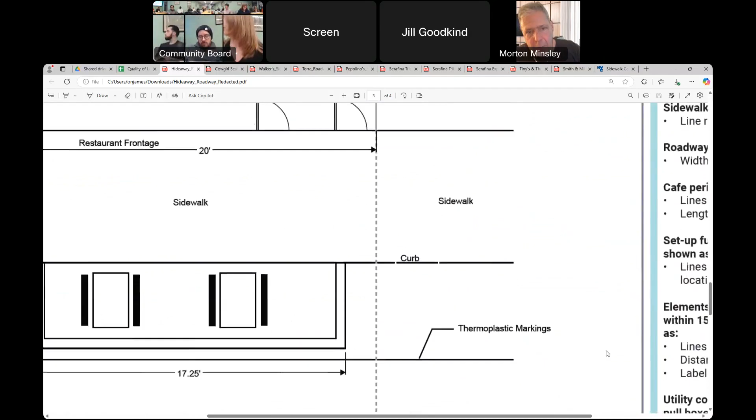2 picnic tables, and that picture is a fantastic representation, 3 people on either side of each table. I mean, very often it winds up being less because people don't want to share the space, so a couple sits down and that's it, sometimes you squeeze a couple more people. It's a lot of babies out there with their parents having lunch during the weekend. And there are umbrellas on those tables. Other than that, that's pretty accurate of what it looked like and what we hope it will continue to look like, and all of the stuff is movable.

Nothing's attached, we actually don't have a floor. We go straight down to the ground with a little bit of a lift for drainage, so there's not a platform. We can just pick it up out of the street and put it back in as needed. Our basement's large enough that if needed, we could remove the picnic tables and bring them downstairs.

We will be rebuilding what I'm referring to as the external barriers, because we had originally built them with just plywood and filled them with sandbags, which I understand is no longer best practice, so we're looking to have water-filled containers instead. We just build that and then box over it with plywood again. We're going to keep it super simple and expand just a little bit, because we're fairly small and don't need anything bigger than what we're doing.

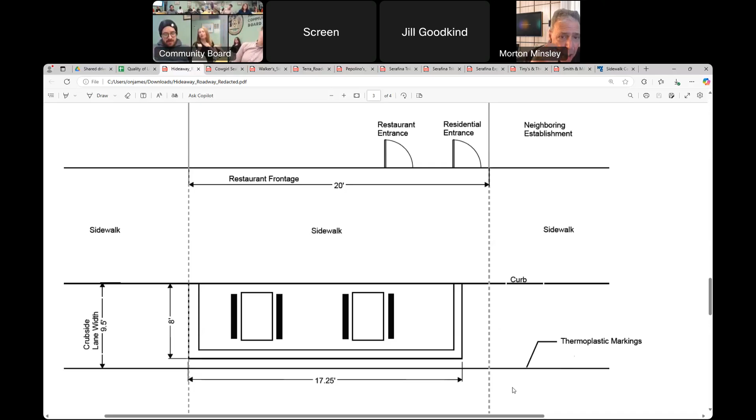Any questions from the committee on this one? Were there, in the previous years, any problems with rodents or other vermin? Because I know the platform ones... Knock on wood, no. And I will say we do maintain ours fairly well, we've got a porter that comes every night, we've got our pest control services, but I will also say I had some fantastic neighbors that were really diligent about keeping our street in general very clean and maintaining their spaces as well. Everyone at Laughing Man and also at Duane Park Patisserie, we were on it as a street, as a block, so I feel like that was very helpful. Again, knock on wood, no, we did not have a problem.

Were there any notable neighbor complaints? Not about outside, we always had it cut off at 11 o'clock as soon as our kitchen was closed, and earlier in the week our kitchen closes at like 10 p.m. So even then, we also close the bar at midnight. So here and there we come outside and scold people, but I never really had many complaints, or at least nothing that got to my ears, nothing significant enough that I got an angry email or phone call from management, et cetera. So besides this outside seating, you don't have any other outside seating? Do you intend to? No, our sidewalk's way too narrow. I feel this is enough.

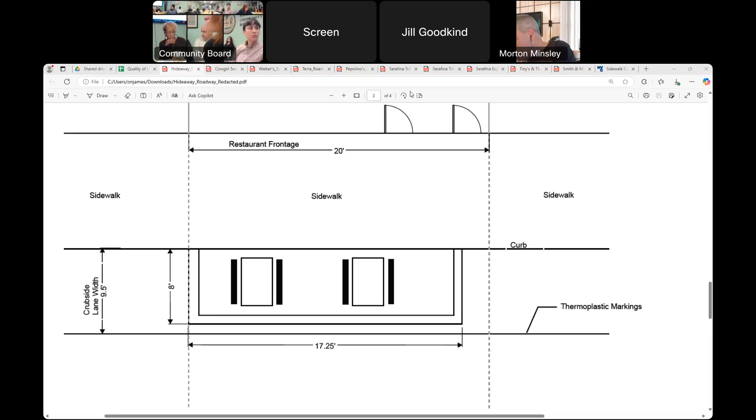Our curb is actually extremely low, but I think I'd have to make sure it was ADA compliant, with a ramp down onto it. Other than that, it's an old curb, so the whole thing feels kind of like a curb cut, like there's a curb cut at the corners. It's about that height, so we didn't really make adjustments other than putting a wedge to make a very small miniature ramp previously. I want to consider that. Yeah, for sure. To get into the restaurant there's a ramp, and then there's an ADA bathroom.

Bring the umbrellas to the table. There's a very, very heavy weighted base that basically lives underneath the table, which can be moved - you kind of tilt it and roll it, very heavy. Then they go down and are screwed on two sides.

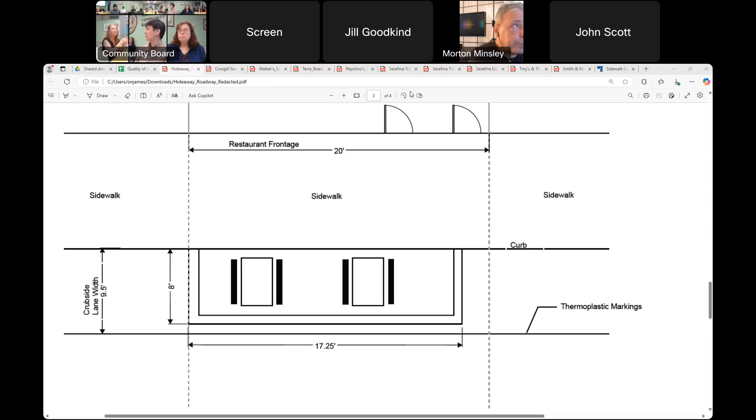We're also fairly diligent, and knock on wood, much like with the rodents, we haven't had a problem - we keep an eye out when we see the wind pick up, especially in Tribeca where there's all these wind tunnels. We run out, say sorry about your shade, and close the umbrellas and bind them back up. Sometimes we don't even open the umbrellas until somebody asks for shade, because it's nice to look open, but then we don't have to worry about where the umbrellas might go on their own. Knock on wood, we've been lucky in the past just by being aware.

Where's your garbage kept outside? Our garbage isn't kept outside, it's kept downstairs. Now that the residents can pick up, hooray, we're actually keeping their garbage can downstairs as well, and my kitchen guys bring it up and put it on the curb. We're keeping our distance a little short to make sure we have space for that at a certain time of night for the residents to place their garbage. All of our garbage goes straight downstairs into the basement until about 8 PM, but we don't bring it out until after 10 PM for our commercial pickup, and then we bring our cans back downstairs before the bartenders leave in the evening, most times.

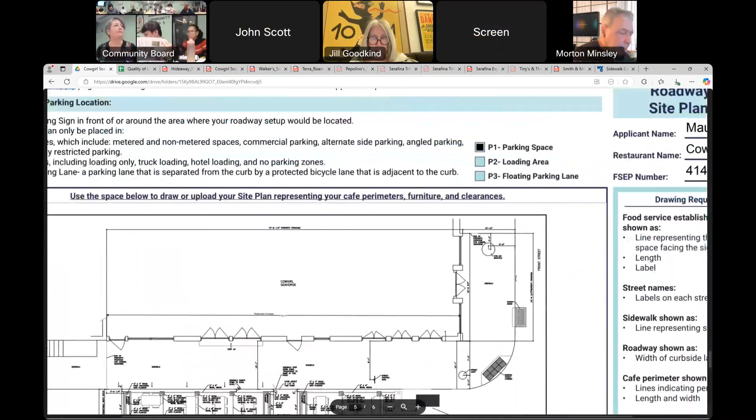They were very kind to help us with that. So we have a manhole cover, a transformer cover, and things like that, which we've now designed around. On one end we have a curb cutout so it's accessible and level with the street. On the other, shorter part, you can see them in here — it's really, I guess I should have zoomed it more.

Could you come show us what's going on here? Of course — I can see what it is, though that doesn't mean everybody can. Here's the transformer box we used to go over. We have one corral here — we call it a corral because it's down — and then a second one here with the 6 feet required between them. There's the transformer box here that we used to go over, and now we don't.

Is that metal thing on the sidewalk part of it? It's there, but it's covered up — it's not part of our setup. I think you can move our cafe off a bit quicker than you can move the car that's going to be there, but either way, we're complying with what they've asked. We have planters around the outside. This side is already accessible; this side will require a ramp, which we're planning to implement for accessibility.

Go, because the floor doesn't come up to the curb? We no longer have a floor. To have a floor now, you have to have the removable and cleanable kind. I decided for this round, with all the new things happening, to keep it as simple as we could. Are you changing the curb type? Yes, we have a curb cut out here from an old use of the building that was never taken away. So you're right by the corner, you have to go into the sidewalk.

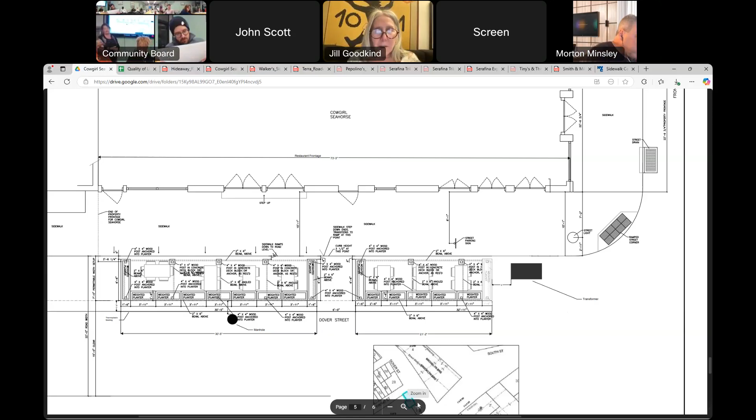And you don't intend to do that again? No, we're not applying for sidewalk seating right now. We think it's a waste of time and money because we don't think we have the clearances.

Thank you. But does it not have the road bed for the vehicular traffic? Yes, they made us shorten it by 7 inches or something. That was one of the other requested changes from DOT that they implemented on our final drawing. We were 7 inches too wide for the emergency vehicles. They have to be seated. Very narrow.

Where's your space for when you put out the garbage? Garbage goes, we have a garbage room inside as well, but we also have 3 of those sealed containers that go along the side of the building away from.

And you have problems with rodents? I mean, we're a block away from the seaport. I'm not saying we've never seen a rat in our lives, but we have a really great exterminator. We plant a lot of mint, which I thoroughly believe helps keep them away. In those planters there, yes, the planters have herbs and fun things to go with our theme, but also be beautiful. We attract monarch butterflies and little birdies. It's sort of a nice little slice of nature.

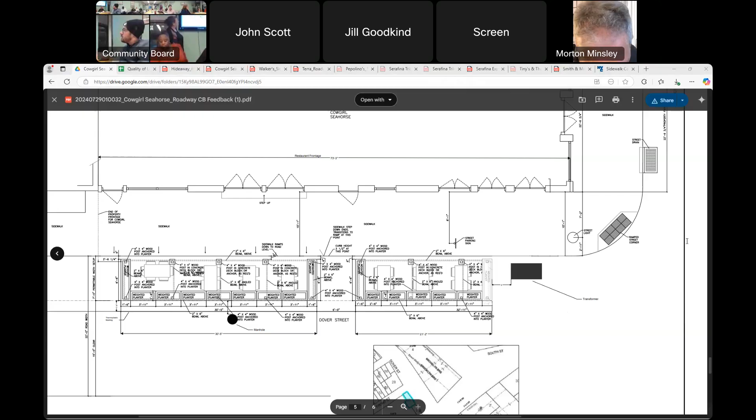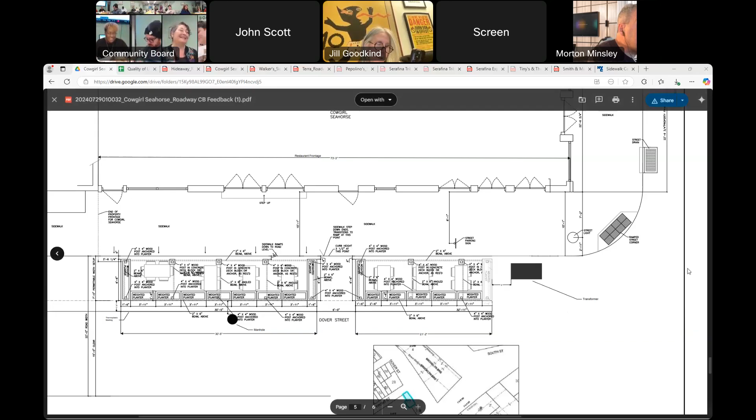We went over that. Just a comment - I've been looking at 311 complaints for each of these and there's not a single noise complaint. Yeah, they're a great place. It's impressive, thank you. We really like to be part of the neighborhood - it's important, I think. They cleaned up the bridge and lit it up, it's really nice. And you're not on the other side of that monstrosity they're getting ready to do.

Talking about 100 Gold Street - nobody commented on that. Which one's next? 250 - no, I didn't see any either.

So can we call the question on this one? Second. All in favor? I would just say everybody - anybody abstain? Anybody abstaining?

Anything? Wasn't that nice? They're so big.

How are we voting here? Are we saying aye or raising our hands, or nay, or whatever? Do you support - do whatever you feel good with.

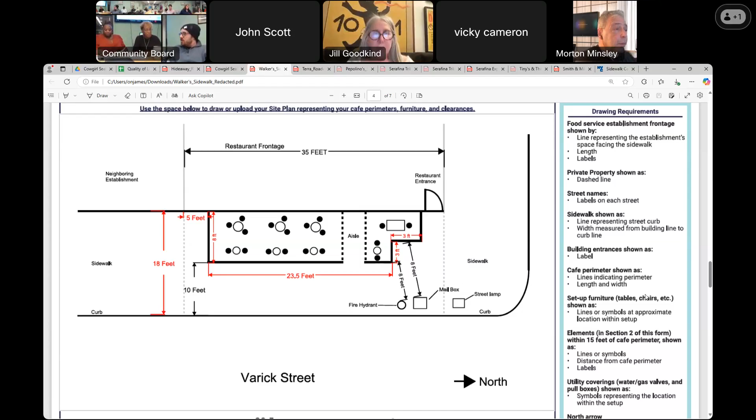Did a dumpster picture? I'm so sorry. In the photos, where is that? Where's permanent? Yeah, that's a permanent dumpster. Is that where you put the garbage from this? Or is that a storage place? That is actually for the residents above. We have our own big containers that we keep downstairs inside.

So there's 15, 16, 17, 19 seats outside. About the tables themselves, we usually set them up in fours, but because there's a little bit of space in the cafe itself, we would be able to turn a 4 into a 6 without going past our area.

Okay, but keeping that in mind, there needs to be enough space for service. Yes, but you're gonna have that obstruction there, so they won't be able to walk on the sidewalk. I mean, yeah.

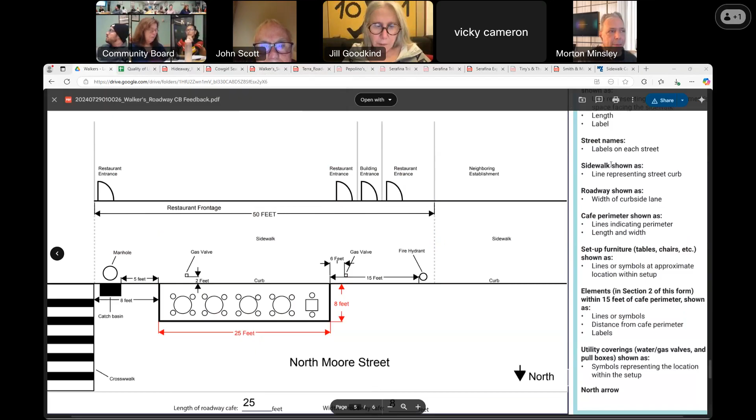The roadway was also, so they're coming back with that sidewalk, because the comment said please ask Walker's to... I believe on the inside, we can seat about 75 to 80. So you're getting an additional bunch of people. The families there, they like to bring people outside for the spring, during spring and summer, and all the dogs.

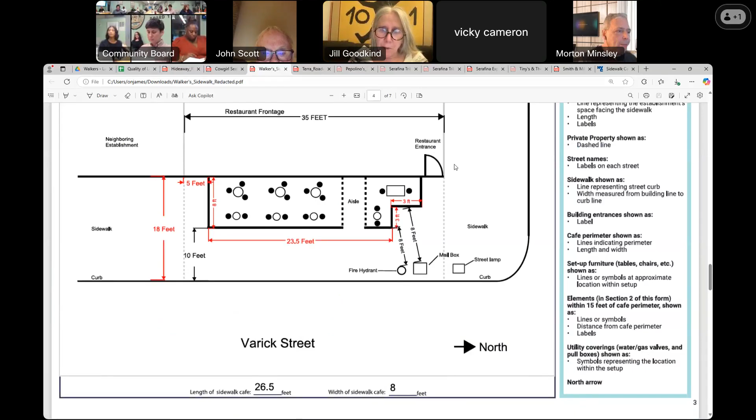I have a question looking at the drawing, I'm trying to understand where the grates are. Is that on North Moore or is that on Varick? On the Varick end. Okay, so people have to walk on the grates.

Can the lady please answer? Do people have to walk on the grates the way you're gonna have this set up? Where would they walk? There should still be enough sidewalk for people to walk without being on the grate. Between the grate and the flower pot, that little small stretch, people would have to walk single file, is that correct? I'm just trying to grasp it.

No, I mean, I've seen probably at least maybe 2 to 3 people walking alongside each other that would be able to fit on that sidewalk. Yeah, because it looks from this angle like you'd have to be single file not to walk on the grate. Am I misinterpreting that then?

I think it's really just that the growth of those bushes in this picture looks a lot more overgrown. Yeah, definitely a lot of overhang there, but that won't be part of the outdoor space once we finish all the new planting and such.

I do have a big concern about this because of strollers. People with canes can't walk on that. People with high heels can't walk on that. On weekends, when you have all the brunch going on, it gets crowded. Do you have a measurement of how much walking space there is actually for the public? Without the grates, because with the grates, it's 10 feet from the drawing. Without the grates, how wide is it?

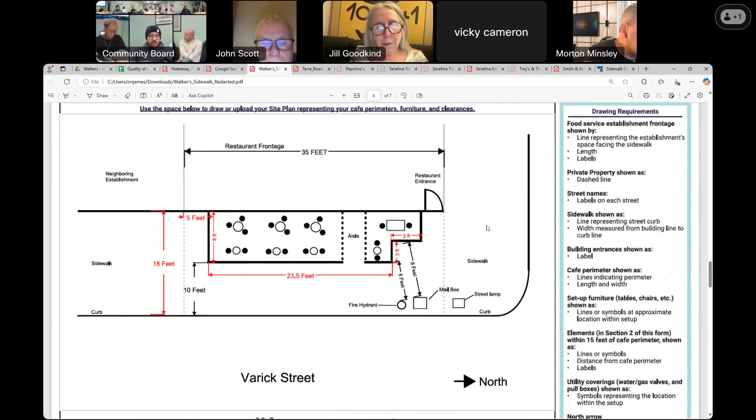I got half that, 10 feet, that's what it says. But the grates look bigger. Can you go back to the grate picture, 10 feet of the grates, please? Look, it looks like there's more grate than sidewalk, and that could just be... is someone talking to me? The sound's not great, so you have to bear with me on this. Is the sidewalk flat and even?

Yes, I would say for the most part it's flat and even. There's no incline or anything, and we don't have any issues in the sidewalk there. It's just two different materials that make it look like it may not be even.

Correct, yes. So these are also the conditions that have been there for 5 years at this point. Wait, who's talking now? Is that somebody from the restaurant? No, no. Oh okay, I'm sorry. I just want to hear from the restaurant people right now, please.

All right, I'm very concerned. I'm sorry, I just want to finish my statement. I am very concerned that with anyone walking 2x2, someone pushing a stroller, that is just not enough room. And that's my final thought on that.

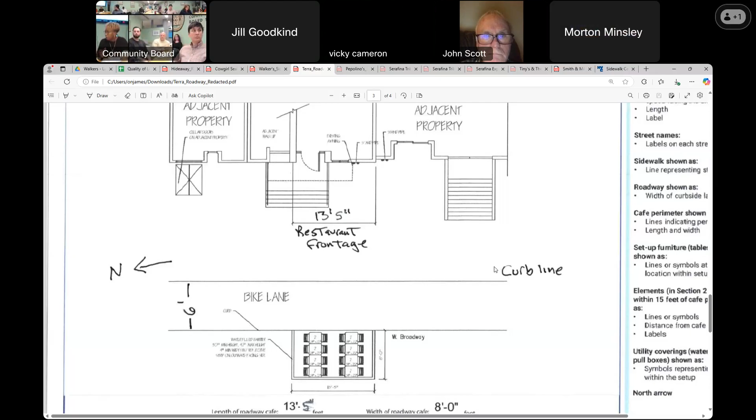It's been 10 for some folks. We want to be consistent. On Sunday? Yes. Yeah, we can do that, no problem. 10 p.m. clean, or 10 p.m. we do not sell anymore. Finish, yes, the last serving, last call, not a problem, not a problem.

Somebody online had an interesting question about the bike lane situation. Is there a photo available? Unfortunately, I was trying to get the photos for you guys today, but our server was down most of the day, so there was an issue getting onto our files for the pictures.

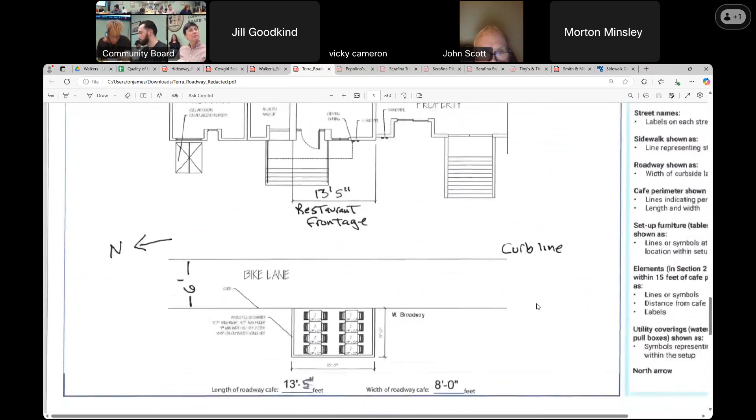Oh, got it. One of these tables is going to be for ADA, right? Yes, probably one of the ones on the end. The end ones would be the ADA tables.

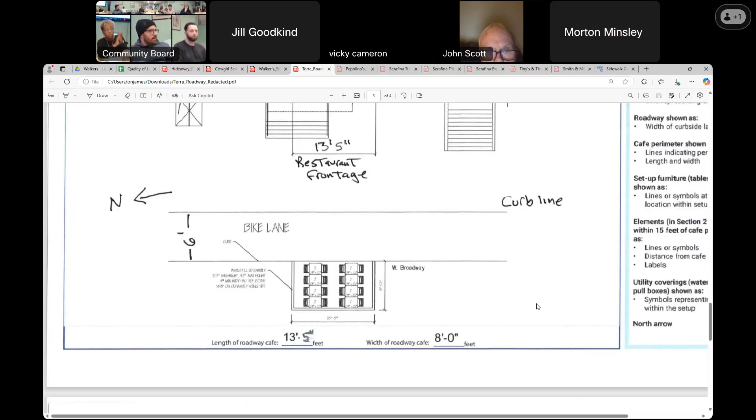Like everybody else, how deep is the curb? Are you probably going to have a ramp? We'll go with a company that makes them flush to the sidewalk so they can pull out, so it would be ADA compliant. So just a little ramp you'll build, but it has to be put in and taken out as needed because there's a bike lane there, right? Exactly. Yes, so there would be a ramp to get in.

We haven't fully figured it out, but since it's the bike lane, they probably were going without the flooring. I don't think they can have one, because of the bike lane they can have a type of floor, but it has to be removable. So that's what we were all talking about, but it's one of those things that's tricky since there's the bike lane there.

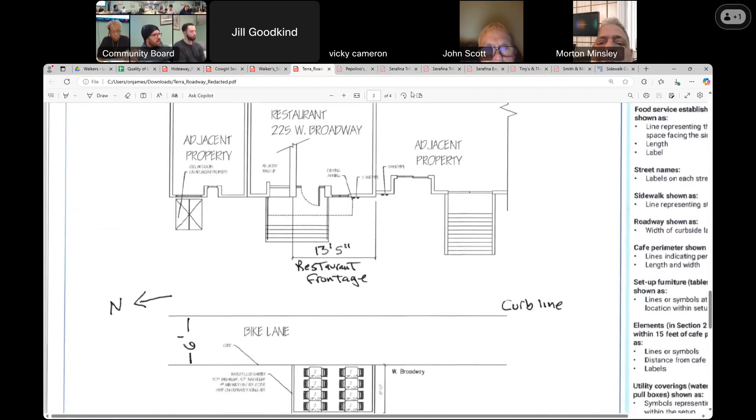There was previously some seating on the sidewalk, right, by the door? So now we can only have two tables of two by the windows. Right, they were high tops, I think, right? Exactly. And you would want to do that again?

Yes, because if you went by Terra recently, you can see we have the outdoor vestibule with those two tables there, and the table really does not block anything because we have a very large sidewalk, thank God. So there's no problem. We have a lot of strollers in that neighborhood, we have a lot, but we never had any issue with this.

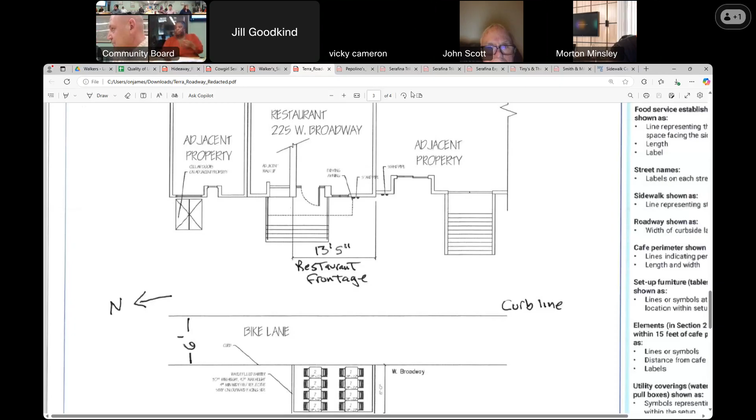Any other questions in the room? Everything seems to be compliant with DOT.

I'm just concerned about the bike lane, how the logistics would work with the bike lane, because I see that being a problem. It's a little awkward. So the bike lane has been here for about 9 months now. We never had any issue with the bike lane so far.

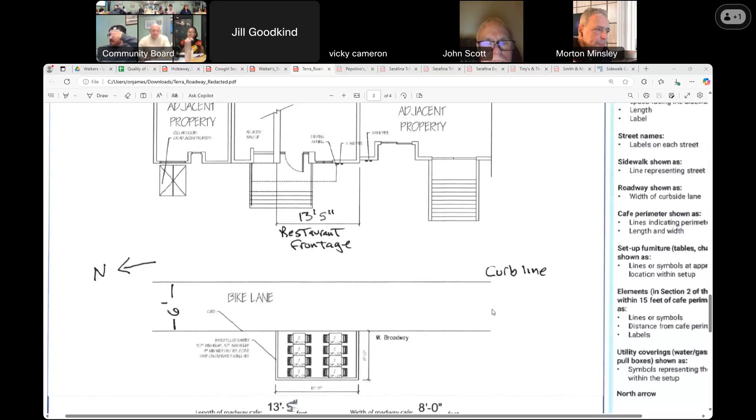They have that set up on much busier streets too, you go up and down some of the avenues, they have the bike lane on Amsterdam I think, and this is fairly less busy by comparison. You'll have to cross the bike lane to get in, no way around it. Yeah, much busier there, definitely much busier as well.

So you have to cross the bike lane to get to the structure here? That's what I hate about them, because you're letting seniors out of the car and they have to basically get out into the bike lane. I can't stand that. Or into the street. Some step into the bike lane, cyclists don't stop. I know, they look at you like you're the issue going across. Seems not controversial to me.

This license, this one, yes. Any questions online? So can we call a question on this one? Yes. All in favor, anyone opposed?

Everyone's in favor. Morton, you're opposed? You're in favor, okay. I'm in favor.

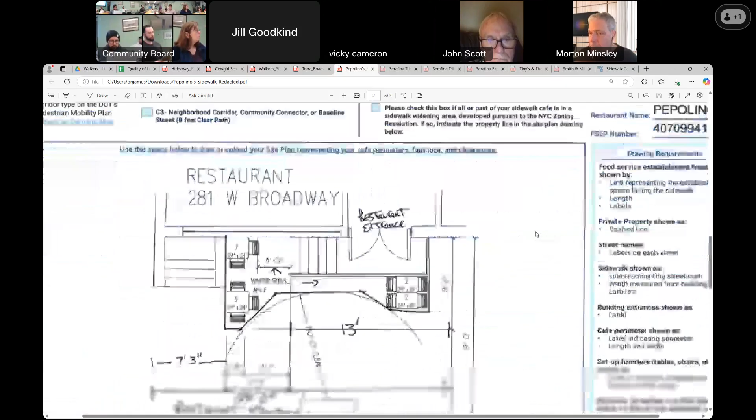Okay, so this is the Sidewalk Cafe application for PEC Group, DBA Pepolino's. We've been open and operating for over 20 years and had a Sidewalk Cafe license since 2003 with 5 tables and 10 seats. Due to the new rules, we have to be 8 feet from the tree pit, so we will now have 4 tables and 9 seats. We'll be using 8 feet in one section of the 19-foot sidewalk where there's 2 tables and 5 seats, and 38 inches of a different section where 2 tables and 4 seats are.

I'd like to ask, any questions? How come you don't have any indication about the major obstruction in this area, about the train station? Is it to the right? The train station, I don't think we're close to that one. Is it? There's no entrance to the AC.

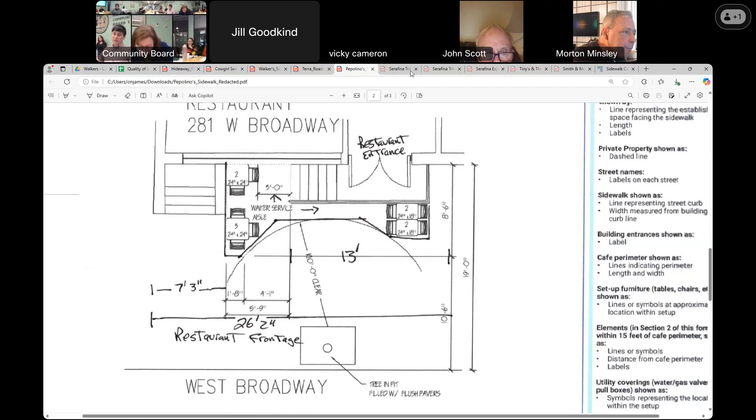What are you gonna have? Probably gonna do stanchions. Oh, with like rope? Yeah. Rope for the pole ones. Those are easy to pick up and take away, too. That's a good idea, you can bring them inside and it gives you that space where you can make sure you have the space.

Needless to say, you're not considering a roadway. No, unless they call us and say they wanna try, but this would be a great spot for that. Yeah, this one was an awkward one altogether.

Can we call the question? Second. All in favor? Okay, online, all in favor? John Scott, in favor.

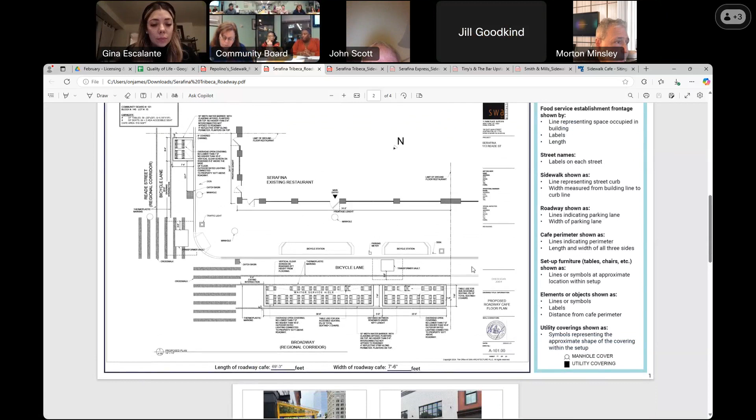Wow, okay, let's start with the roadway. We're beginning with the roadway first. Okay, how many seats do you have inside the restaurant? Let me confirm that with Kevin.

We don't have any pictures, we just need to know. It's 130 something, just outside. New bathroom, it's a large venue outside. And there's an upstairs, I don't think you can- yeah, and then there's an upstairs. How many toilets do they have? It's two.

Well, I mean, it's two separate kind of roadway pathways. That matters, yeah, if it's separate, we separate the space into two sheds. It's not supposed to be, for the whole Broadway Street, because they have a long facade. Free share, you know? Gina, is it supposed to be a 6 foot separation? It is - when you have a 40 feet length in a roadway, you need to put a 6 feet separation in between roadways. But if it's less than 40 feet, you can have 3 feet for the separation.

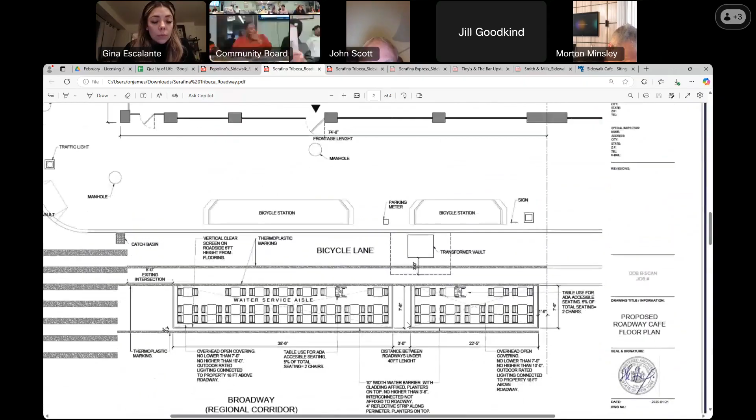That's criteria for- can we not separate the two and talk about the totality first? Because we're talking about the sidewalk, this thing, in addition to the roadway. Well, right now we're only talking about the roadway. Oh, I understand that, but I think it would be helpful to get a full scope of what's being asked here. Yeah, I don't disagree with you, because I'm already thinking about the number of people in totality, like you said.

So for inside venues, we use the Department of Buildings guidelines, and they constitute a large venue at 75 people. This is talking about over 130 people outside on the sidewalk and in the street. I don't know how to necessarily go about addressing that.

Well, I guess my first question is, are we talking about the roadway or the sidewalk or the whole thing? Roadway first. So the comments that we need to put in, we need to put in comments for the roadway - it's a separate form, and then comments for the sidewalk, which is a separate form. That's why we can't do them together necessarily, but you can discuss them together.

Right, so I guess my question is, unless I'm mistaken, there's an element of the sidewalk shed that's still there at the moment, is that correct? Sorry? No, the sheds were taken out already. Actually if you go to Google Maps, they don't appear anymore. The sidewalk ones, the ones on the sidewalk?

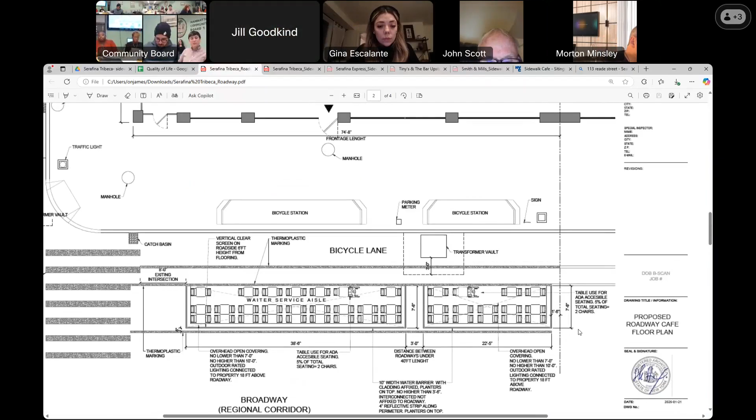I'm waiting on the response on the ADA bathroom, but as soon as I get it, I'll let you know. Thank you. Now, answer me this: how did you come to that number of seats outside?

What do you mean, how did we come up with this number? To maximize the capacity - how was it determined to attempt to put 130 seats outside? Well, we fit as many tables as we could, to be honest. But as I said before, we're open to changes, we know there are going to be some.

How many did you have before? Before, during COVID? Yeah. For the roadway. They did - let me confirm that.

The main bathroom on the main floor is ADA compliant, and 3 bathrooms upstairs are not ADA. Thank you - how many, I'm asking for the public. 35 on the sidewalk and 80 on the roadway.

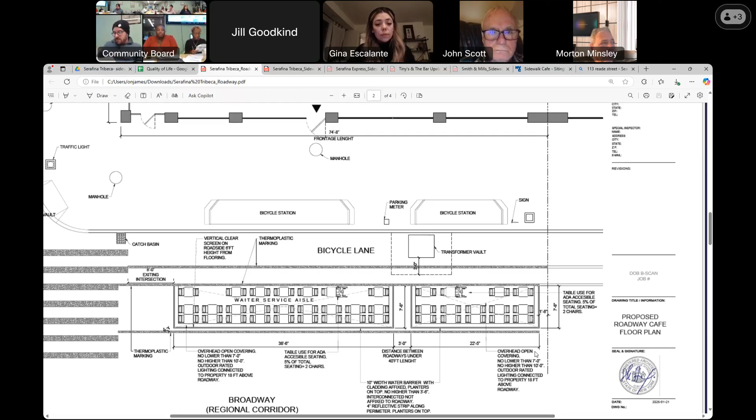As a starting point, I'd say the ones on the more residential street, Reade Street, is not something new we should do. First, to share with the committee, based on the number of bathrooms, Ned is looking at the regulations. She brought it up a few minutes ago - for 200 people, it's 3 bathrooms. That's the capacity.

So 200 people is the capacity for 3 bathrooms. Just to clarify, there sounded like there was 1 on the ground floor and 3 upstairs. Is that inclusive of the employee bathroom? I think that was separate from the employee bathroom, but only 1 is ADA compliant.

Is there anything additional? We should get clarity, because she said 3 before, now she's getting 4. There was a reference to 1 bathroom on the ground floor and 3 upstairs. Are those all publicly or customer accessible? They confirmed they have 1 bathroom that is ADA on the main floor and 3 upstairs that are not ADA.

Are those all customer accessible, apart from the employee bathroom? They have the employee's bathroom separate - that's additional, in addition to the 4... correct, in addition to the 3. But that's only for employees. Okay, so 4 for the public altogether and 1 for employees.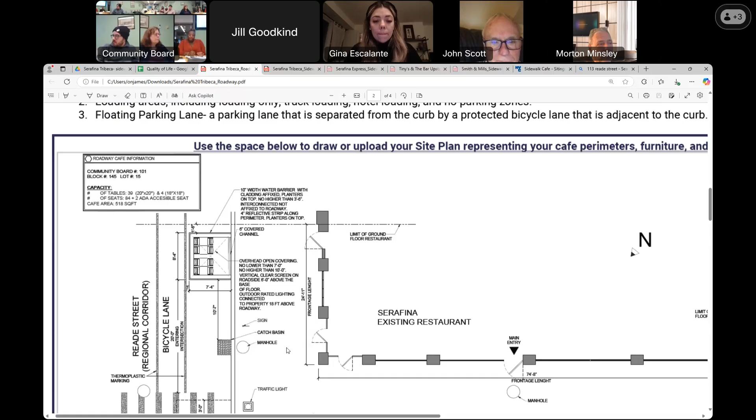We're just trying to make sure we're clear, because earlier you said there were 3 bathrooms accessible to the public. Now we're saying there's 4. Is that correct? 1 ADA and 3 that are not ADA.

Is there any regulation regarding the number of ADA bathrooms for the number of people? Since ADA is the only one on the main floor, if more than 1 person upstairs needs that, it could be a problem, but there's no regulation for that, she said.

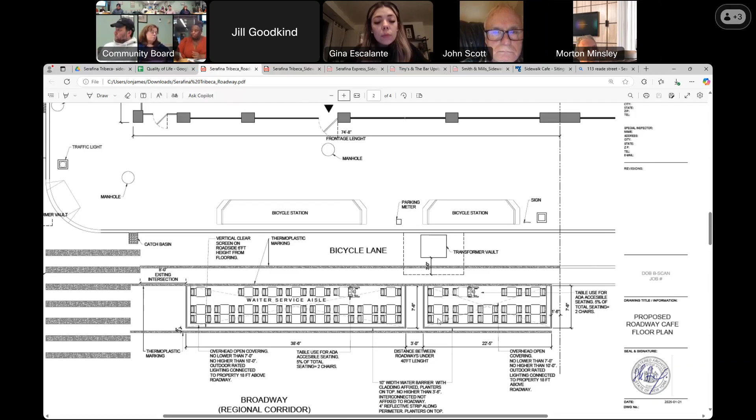Okay, so with 4 bathrooms, the total number of people they can have outside is 74. So we can start from there and make further adjustments. So you're suggesting the maximum is 74 - that's not for the outside question, that's the regulation.

So what if we start - you said 85 outside, right? 84. Okay, so we've got to get rid of at least 10 seats outside.

I think the most viable option would be to eliminate the shed on Reade Street, which has 4 tables, meaning 8 seats. I'm looking at this index - are the Reade Street ones meant to be the ADA accessible tables?

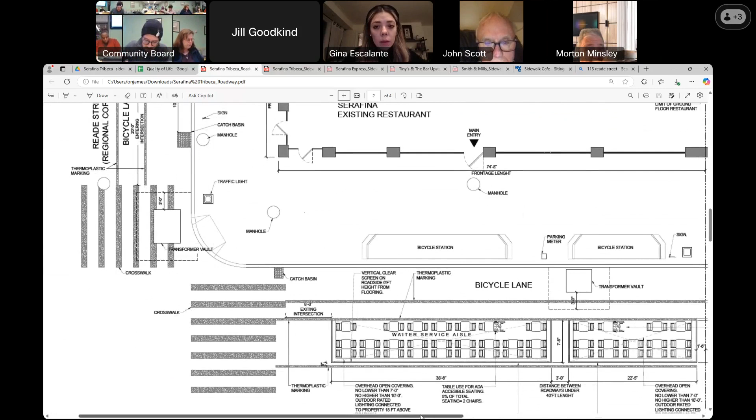No, we can leave the ADA accessible ones - we have them right now on Broadway. Jared, look up there - these are the ADA tables. Oh yeah, there's one in there, see that? Here, you're pointing here? Okay.

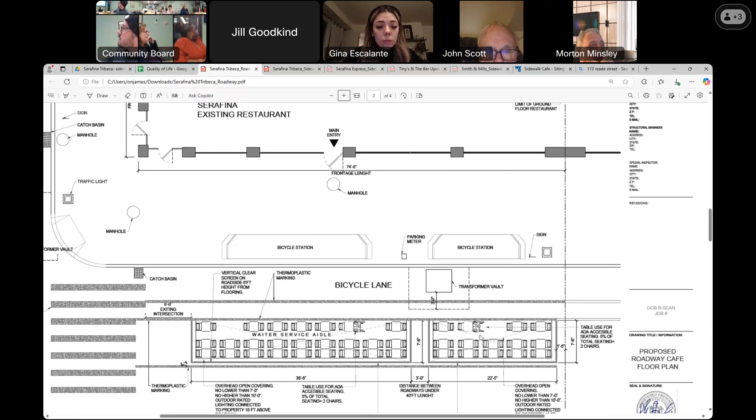So how is the street furniture situated with West Broadway and the bike lane? What are the actual mechanics of that? I'm sorry, I didn't understand the question.

Regarding the street furniture on one plane, what are the mechanics - how does somebody with a mobility device navigate all of this furniture, the bike lane, to get to the seats? I'm sorry, the connection is breaking up, but I think I understand - how are people in wheelchairs going to enter the roadway?

Well, unlike some of the other applicants tonight, you don't have raised platforms. But since it's on the roadway, it cannot be raised - it has to be flush with the road.

What I'm asking is, you have bicycle stations, a parking meter, and a bike lane - for somebody in a mobility device to get to the seating, how do you envision that?

They have a curb cut on the corner, and the crosswalk is for people to walk - wheelchairs are able to go through there. Plus, between the bicycle lane and the parking spot, you have an empty area that a wheelchair can go through.

And there'll be a ramp down from the sidewalk at the parking meter gap? I don't know if you can legally put a ramp there because you'd be obstructing the bike lane. The most optimal option would be for the person on the wheelchair to go through the curb cut and then go inside the roadway.

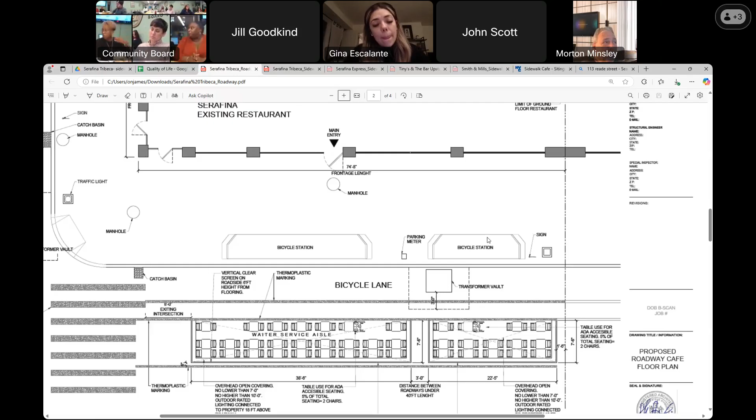Jill, online? Online? Jill, John, and Morton. So I just wanted to make sure you guys heard what we were talking about. There was an original proposal from the client, the presenter, to have 84 seats in the roadway.

Nash looked up the regulations, and based on the number of bathrooms that they have, it looked like they need to go down to 74 seats. And then we asked how many, 74 persons per bathroom? Okay, but we're talking, but we moved on, we already voted just now.

Are they still doing the sidewalk as well? We inquired as to how many seats they had during COVID in the roadbed, and that was 50. Is that correct? 50 roadway? I have here 80 on the roadway, 35 on the sidewalk. No, during COVID. Yeah, during COVID. Oh, okay, I'm sorry, I misunderstood before.

They had. So if it's 74 people per toilet -- also, the manager is telling me that the hotel next to the restaurant connects on the interior through a ramp, and they let them use their ADA bathroom too. You really don't, and that's not supposed to be allowed. You're not supposed to be able to share. I remember that part. Okay. Everybody has to have their own. They can do that, but it's not considered acceptable.

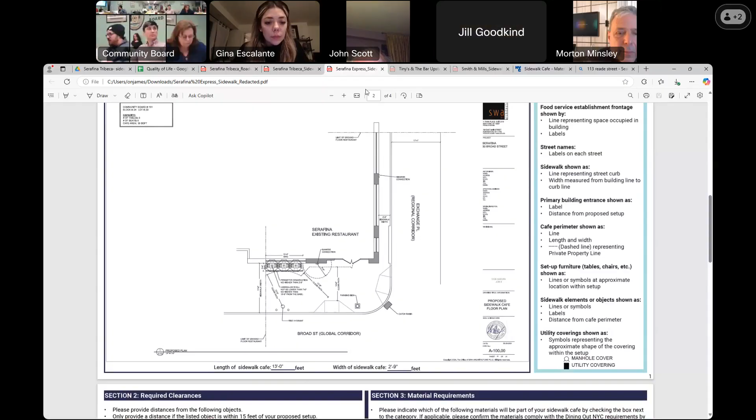Because here, on this, it says 11 to 11. Can you repeat that? 10:30 a.m. to 10 p.m., Monday to Sunday, the whole week. So it's different - it's a different location.

Great, well we're looking at the 30 Broad. Yeah, so on this thing it shows 11 to 11. Yeah, don't consider that. Okay.

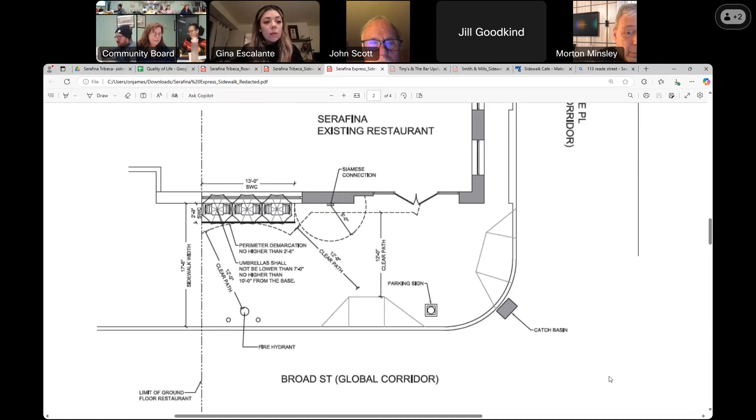Double what? Is this one about Joe and the Juice? This sounds good to me. Seems good. Call the question. Seconded. All right, all in favor? Any no's, refusals, any abstentions? Those online, in favor of John Scott.

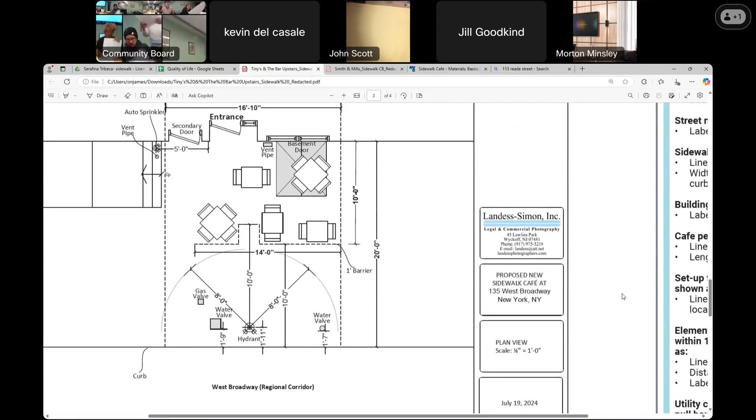So what's up, do you have tables in the basement? Places do that, it's a bit bouncy I think. We had roadway seating during COVID. We hate roadway seatings, we will never file for a roadway seating again. You don't actually need them, and they become an albatross for the community. Then you have to staff them and hire people that don't make as much money, because it doesn't actually work. But for us, if I had a 450-seat restaurant maybe I'd feel differently — I'm just kidding, I don't know how you could have so many people in Tribeca at one restaurant.

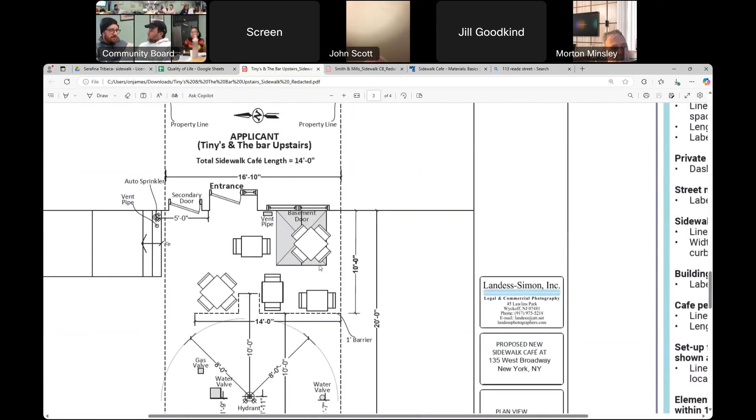How many seats are there in the current configuration? In the current configuration at Tiny's, it's the same. It may not actually be the same at certain times — sometimes we don't set it up with all 14, but effectively that's what's there right now. Right now there's an enormous scaffolding that's been there for a while, so we lost a few seats. That's what's been there, not obtrusive, and that's the max. When the scaffolding comes down and we're fully set up, this is what it's going to look like. As long as nobody gets upset at me, I'll move a table from time to time, because the next door building has a platform they have to deal with, so anyway.

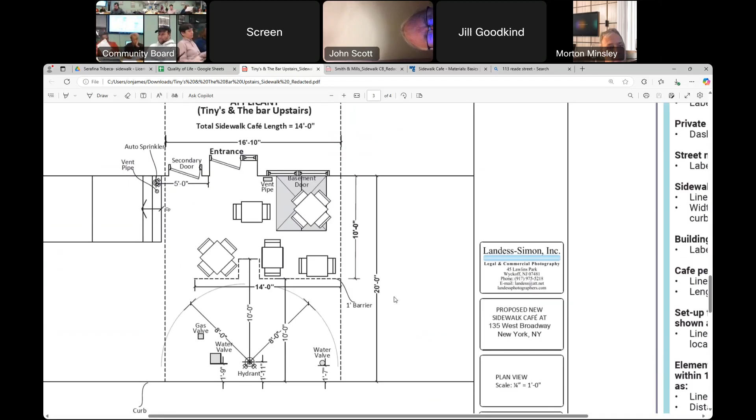You're there 16 years, no problems, everything's fine. Everything's fully accessible. And the hours are — is it early? Well, we usually like to close a little later. If there's business we would close a bit later, but yeah, we're open all day and we'll typically close the kitchen around 10.

But I think our license to sell alcohol is, I believe, till 2 a.m. I know that legally we have to shut down — last people seated at like 11 and shut down by 12. I don't think we are ever too close to that.

If you want me to — you mean outside? Yeah, outside is — frankly inside, we're not open at 12 either. Like I say, if I had the business, to be honest with you, I would stay open, but if something was going on in the area, you might have more special foot traffic.

So this is correct, let me look — yeah, early. I think there were two comments on that sheet. One was to check that there were no objections; the person said they recall there were complaints, but I'm just reading it out. Thank you so much, I appreciate that. What kind of complaints are you referring to? I don't know what kind of complaint we would have — we don't have any problems.

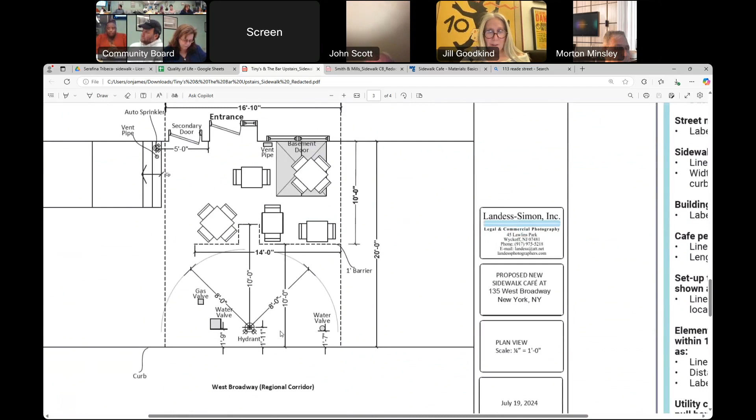And then they said, I recommend the cafe sidewalk move back to the alignment of 10 feet from the hydrant. It is 10 — it looks like it already is. I understand that comment, but that's just from the picture that he gave. Call the question. Second. Second. All in favor?

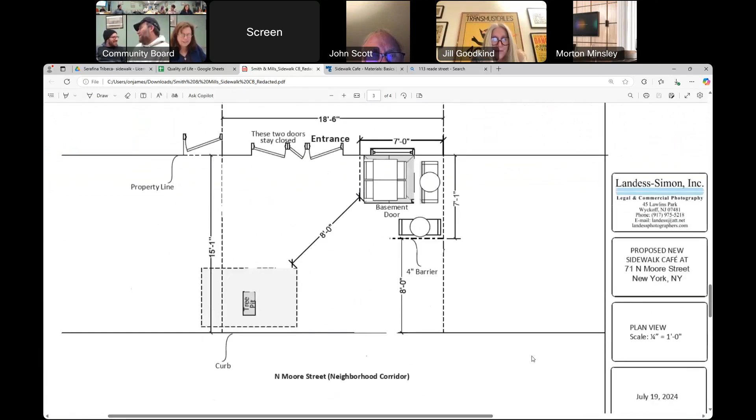Do you have this many seats outside now or in recent summers? Yeah, absolutely. How many seats? They're small tables - 6, 8, 10, 12 seats. There are 28 seats inside, including the bar. So the last seat, you have to be comfortable being close to your neighbor - get to know your neighbor.

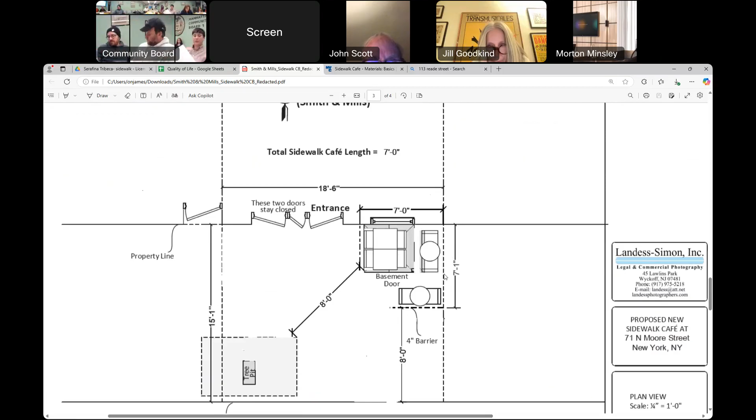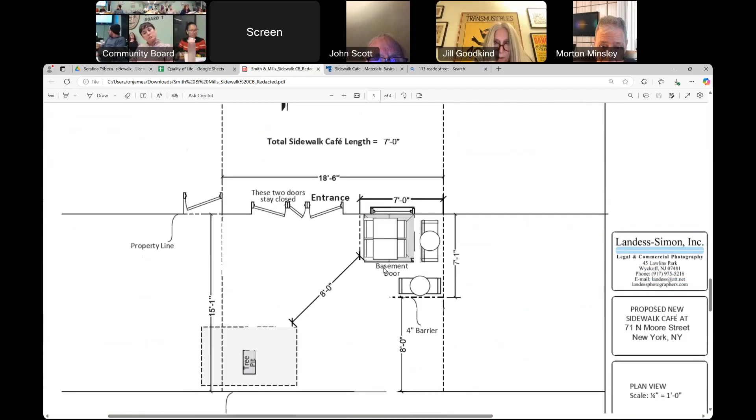You don't see both? It's 4 - is that the right one? Oh, there's no 4 here, this is 3, what you submitted was twos. I need you to send me this email - actually, no, I'll just scan this. What is that, it's weird. That's an old one, I'm sorry. You want me to resend you this? Yeah, this is what DOT sent me, so this is what they currently have - they don't have this. That might have been when we had the enormous roadway seating area last time.

Okay, so we'll send this to you. Yeah, I need you to send this plan. They have it.

Can I keep the pen? Absolutely. Don't say we never gave you anything. Yeah, exactly, it's here for a while, got a pen. And a lot of... yeah, you stayed all day.

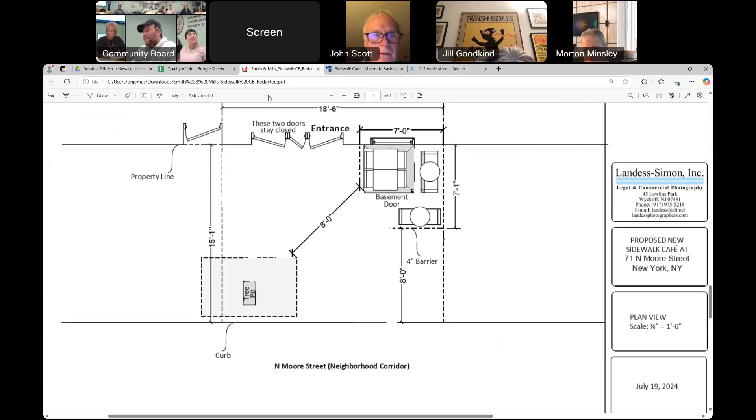Thank you for your patience. My pleasure, this is our first time doing this. Well, was it Warren 77 you guys did? Yeah, I did Warren 77 a long time ago. Man, I love this business, I love this city, but take it easy on the restaurants, guys, it's hard out there. But you guys have to get what you need. Thank you, see ya, take care.